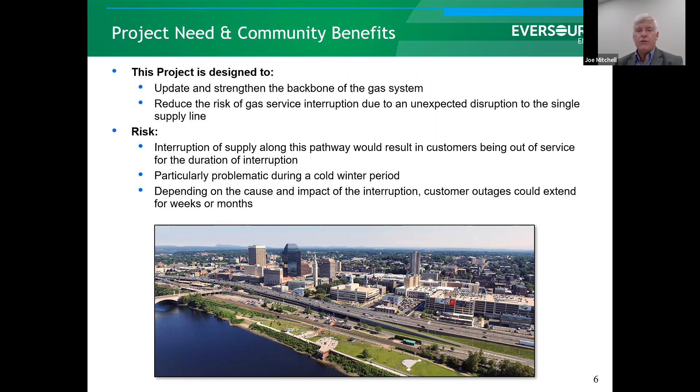In a gas interruption, it is necessary to shut off the system at every customer's meter, in addition to other system cutoffs. Additionally, after repairs are made to resolve the cause of the outage, valves are opened in segments, which include customer shutoffs. Safety checks are conducted, and pilots are relit. Entry into people's residences and businesses is required to accomplish this very time-consuming restoration process. The services of locksmiths and law enforcement are often required in this complex process.

If there were an issue to the distribution system originating at or near the Agawam gate station due to mechanical failure, natural disaster, or third-party damage, it could have an unprecedented impact on the community.

In such an event, Eversource would stand up its incident command system and would likely draw on the Federal Emergency Management Agency, or FEMA, and the Massachusetts Emergency Management Agency, or MEMA, and the National Guard for resources and assistance.

Temporary shelters would be established, and depending on the severity of the outage, some of those shelters could be a significant distance from the Springfield area. We would call on other utilities nationwide for mutual aid.

Making the system safe is a time-consuming process, especially with a high number of meter sets located inside of dwellings in this area. Assistance from locksmiths and law enforcement would be required.

Once repairs to the system are made, the process to restore service to customers is an even more complex and time-consuming one. Gas infrastructure is restored in segments, safety checks are accomplished, and pilot lights are relit in every residence and business.

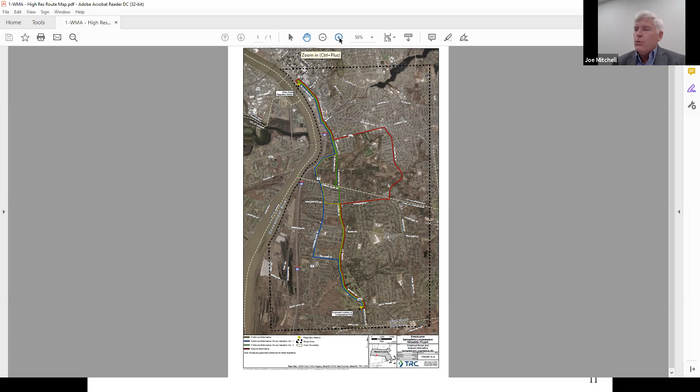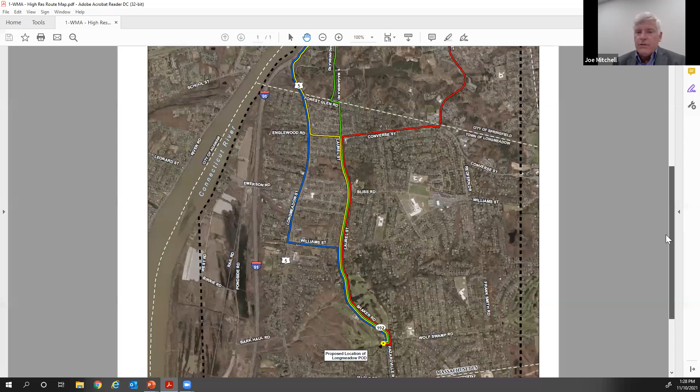This is a map of greater detail. As you can see from its elongated shape, it does not fit well in the slideshow presentation. I will zoom in now and go over these routes. Please note that the coloring on this map is different than the one on the previous slide, but you can see a greater detail of the preferred route, the variations, and the noticed alternative. Again, this is on our website, which I'll give you the link to at the end of this presentation.

Sorry for the delay.

Proposed point of delivery: the point of delivery is where the natural gas is transferred from TGP's transmission system to Eversource's distribution system. It is our desire to have the POD as unobtrusive as possible. All infrastructure will be contained indoors. The proposed buildings will be designed to match the existing Longmeadow Country Club building nearby. Noise reduction, construction methods, and materials will be used.

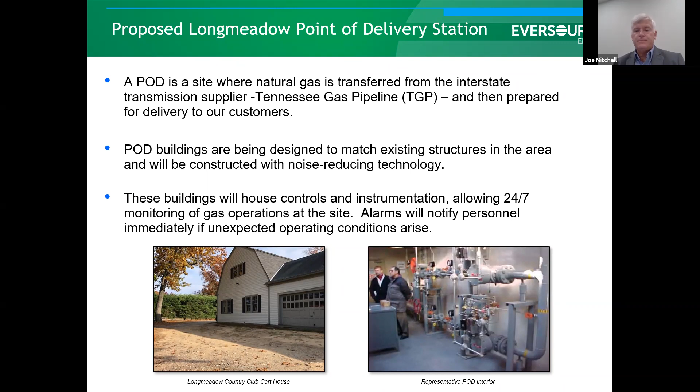It is proposed to have 5 buildings located on the approximately 2.5-acre site. 2 of the buildings will belong to TGP and 3 will belong to Eversource. The equipment inside the buildings will be used for pressure control, metering, heating, odorization, fire protection, security, and telemetry.

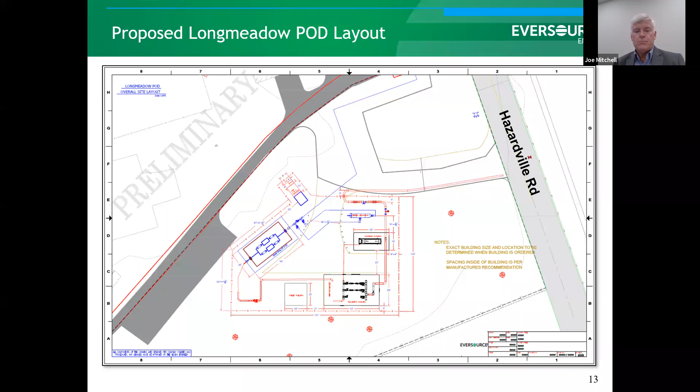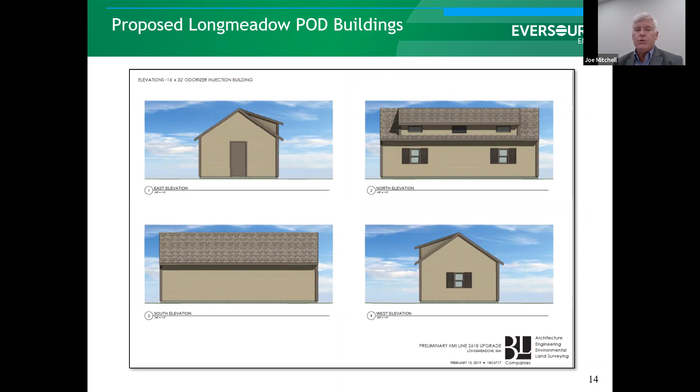The safe and reliable delivery of our energy products is the primary mission at Eversource. The point of delivery facility and the entire project will employ all of the latest technologies with an eye on safety. Alarms, telemetry, on-site visits, and corrosion protection are just a few of the safety measures to be engaged.

The individual who has been responsible for safety training in the region for the last several years is our Senior Specialist for Gas Emergency Preparedness, Eric Madison. Eric was a firefighter for 35 years, serving 30 of them right here in Longmeadow. He was chief of the Longmeadow Fire Department for 15 years. Eric knows the natural gas delivery infrastructure and is also intimately familiar with firefighting response and procedures. He is uniquely qualified to enhance safety through first responder training for all aspects of the proposed project.

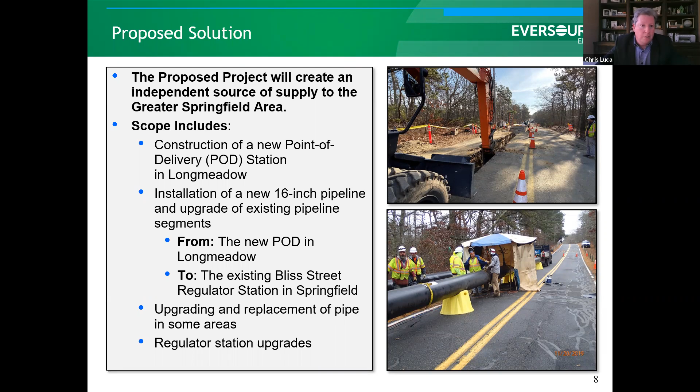Thanks, Chris. Next question, and we had a few variations, questions regarding the Memorial Bridge. Since the existing pipeline through Memorial Bridge and the new pipeline both go through the same Bliss Station, essentially, why is the second line needed? I think we need to clarify that. Rich, I'll ask you to expound on that a bit. So to clarify the question, the concern is that with this project, installing a new second source of supply for the area, would the Bliss Street Station and the Memorial Bridge still pose a risk of a single point of failure?

So to address the Bliss Street Station concern specifically, it is correct that both lines, the existing line that travels from west to east from Agawam across the bridge into Springfield and terminates at the Bliss Street Station, as well as the new line that we're installing north through Longmeadow and north through Springfield, also terminate at the Bliss Street Station. It is true that both lines do terminate there, but in order to mitigate the concerns of a single point of failure at that station, there are design considerations and design requirements that the Code of Federal Regulations mandates us to abide by. And most importantly, as it relates to this issue, is facility separation. So as we design this station, Eversource would be required to provide adequate facility separation to ensure that no single event would result in a failure at the station.

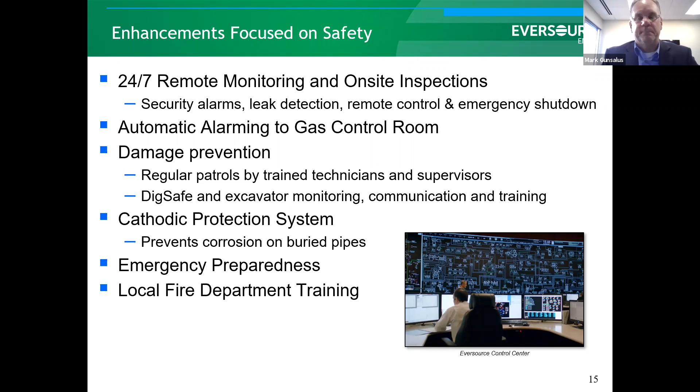Dispatch has already come over. We stood that up in June. The next piece will be gas control, which is now in Ohio. So they are monitoring and controlling our systems, working directly with our team locally. That will be the last operational TSA agreement in Q1 of 2022, and we'll be fully on SCADA at that point. Back to you, Chuck.

Great, thank you, Mark. Another question just came in, and I will have Nikki Bruno respond to that one. We had several variations of this question: what are you doing to prepare for customers transitioning off gas to renewable energy?

Thanks, Chuck. So we're doing a number of different things, but I think probably the most relevant is participating in and spearheading the concerted effort in the Future of Gas proceeding that the DPU has open. It's of course separate from this project, but all 5 Massachusetts-based LDCs are investigating decarbonization alternatives to meet the state mandates of 2050.

So we have a consultant actively engaged on providing technical modeling and alternatives. We're also going to be submitting in March a revised business plan for our gas company. That's underway, and I invite anybody who wants to learn more to visit our proceeding website. It's called

thefutureofgas.com. In the interim, Eversource specifically is working on a 2030 goal of carbon neutrality for our operations. We're also undertaking a network geothermal pilot in the NSTAR gas service territory to test that technology at utility scale. So we're trying to move alternatives along and learn from pilots and from the proceeding I mentioned, so that we can safely, affordably, and reliably transition customers to meet the state goals. Thank you.

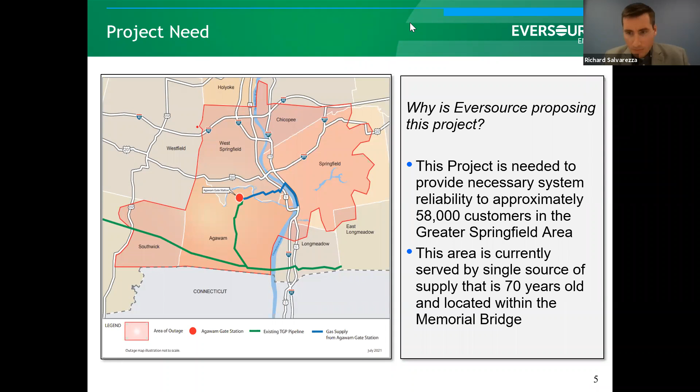In regards to the pressures that customers receive from the pipelines, this is another valid question. We would not actually be serving any customers directly connected to this new proposed pipeline. Its only function would be to send gas north to the Bliss Street station, so no service lines would be connected from it. I'll turn it back to you, Chuck. Thank you.

Thanks, Rich. Mark, I think we had a couple acronyms — TSA was one that people may not be familiar with. So let's just make sure we clarify those things for folks. Yeah, thank you for that, Chuck. I apologize, we have too many acronyms.

What a transition service agreement is — that's what TSA stands for. As I said, this was an asset purchase, so employees and assets came with the buy, and things like gas control and dispatch, for example, were under a transition service agreement so that we could safely operate the company while they dispatch for us, which is now in Massachusetts, and while they right now view and operate our gas control system. We have a very sophisticated agreement, so we know exactly what the communication protocols are, and a plan to get it transitioned over in Q1 of 2022. Thank you, Chuck.

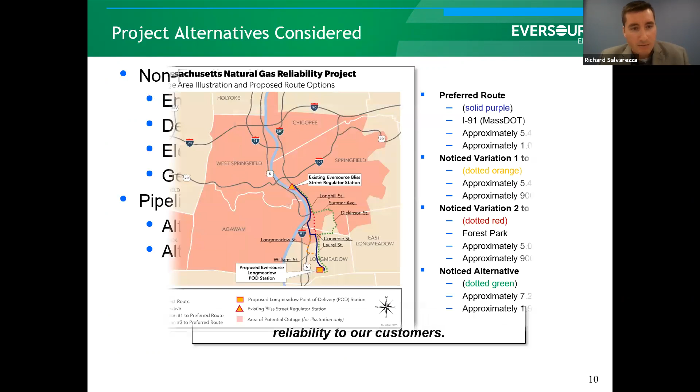I'll go into some details on the final 4, talking about some stats for each one. The preferred route, through our analysis, has earned the most favorable rating when we combine all the environmental factors, human impacts, and cost. This is a 5.4 mile route.

It originates at the proposed POD on Hazardville Road, turns onto Shaker Road and travels north, and Shaker Road eventually becomes Laurel Street. The preferred route turns west onto Converse Street and then turns north onto Longmeadow Street, where we cross the Springfield Longmeadow town line and continue towards the Longmeadow Curve area of I-91, and eventually pass under that Longmeadow Curve area via a directional bore, and we arrive at Longhill Street, where we travel north, eventually crossing Mill Street onto East Columbus, where eventually we tie to our Bliss Street regulator station. So that was our preferred route, 5.4 miles.

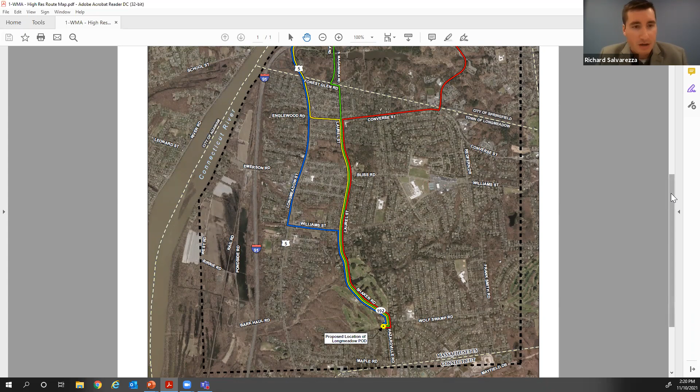There is a noticed variation, two variations of the preferred route. The first variation follows the same route north on Shaker, but it turns west on Williams and continues north on Longmeadow Street. It rejoins the preferred route at the intersection of Converse Street, and all other aspects of that route are the same. It is nearly the same length, again 5.4 miles, and it has the same cost of $34.7 million.

That's an estimate, and we're continually refining it as we move forward into our filing. It is a challenge to accurately estimate the value of a project like this. We're up against some fluctuating steel prices that are a significant factor for our estimate, and we're also attempting to forecast costs a few years into the future.

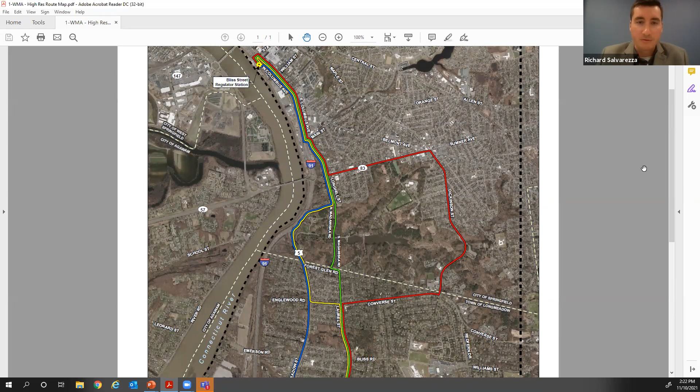So that was noticed variation 1. Noticed variation 2 is again very similar to the preferred route, traveling north on Shaker, north on Laurel, but continues past Converse Street, and in fact travels north through Magawiska, through Forest Park, and joins with Longhill Street, and then eventually, similar to the other routes, continues onto East Columbus. This route is somewhat shorter at 5 miles, and the cost is also less at $32.5 million. It is the least cost option, but it does have some additional environmental and human impacts, given that we are going through the parkland.

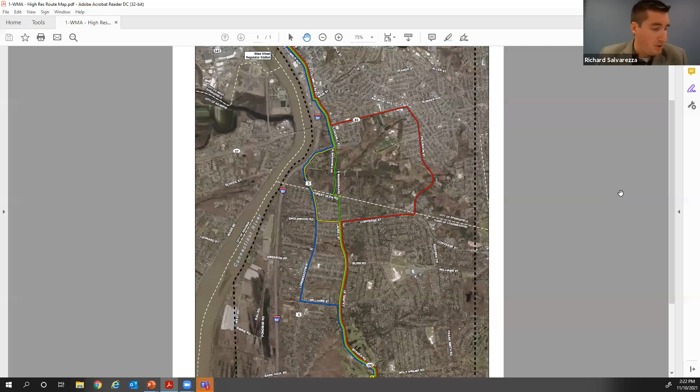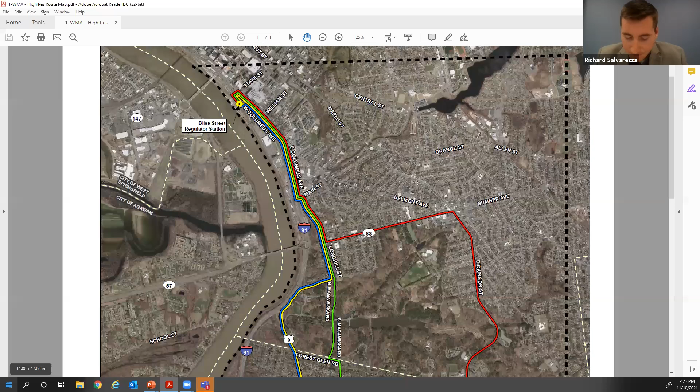The final route, the 4th route, is the noticed alternative. It's the longest route, significantly longer than the other options. It originates again at the Hazardville Road POD location, travels north on Shaker Road, north on Laurel, but this route turns east on Converse Street and continues to the Springfield Longmeadow town line, where it turns north onto Dickinson Street and follows Dickinson Street until we get to the area around the X intersection in the Forest Park neighborhood. We bypass the X intersection via some side streets, and we join with Sumner Ave, and Sumner Ave takes us to Longhill Street. So this alternative is the longest, 7.2 miles, and it correspondingly has the highest cost of $44.6 million.

So again, we're analyzing these routes. It's a statistical approach that combines various impacts, including human impacts, environmental impacts such as parkland impacts, wetlands, and it also looks at cost. There's a weighted formula that evaluates the routes, and this is how we've staggered or aligned our preferences.

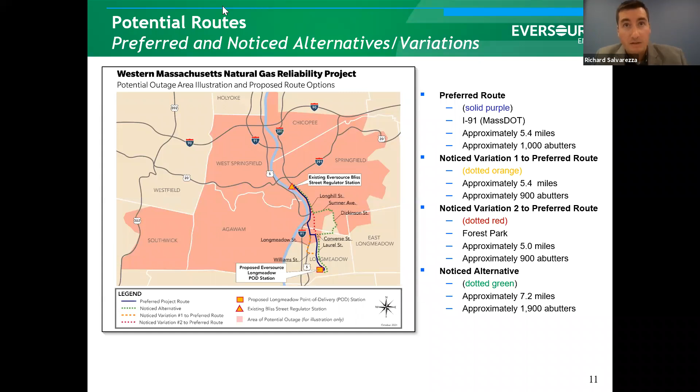In regards to how this project would be funded, it is correct that it would eventually be funded by customer rates. However, being that we are a regulated public utility, any project costs incurred from the project would be subject to an evaluation by the Massachusetts DPU, and the DPU would eventually determine whether or not those costs would be prudent.

And we have looked into what the approximate impact would be to our customers. For the average residential customer, the impact is approximately 1% per month, which if we look at the average residential customer, that cost would equal about $1.25 per month increase.

I did see another question in the chat regarding the evaluation of some western routes that follow kind of the railroad area, the I-91 area of Longmeadow, and travel north to the Longmeadow Curve area. There was some question of why we weren't analyzing those options, and to answer that, we actually were. There are 3 alternatives that we looked at as a component of the 12 initial routes, and those routes were eventually deemed to have a tremendous impact to the environment. There are some conservation areas, there are wetlands, and there's also impacts to I-91, which we're attempting to avoid. So 3 routes in that area, kind of in the railroad, Pondside Road, I-91 region.

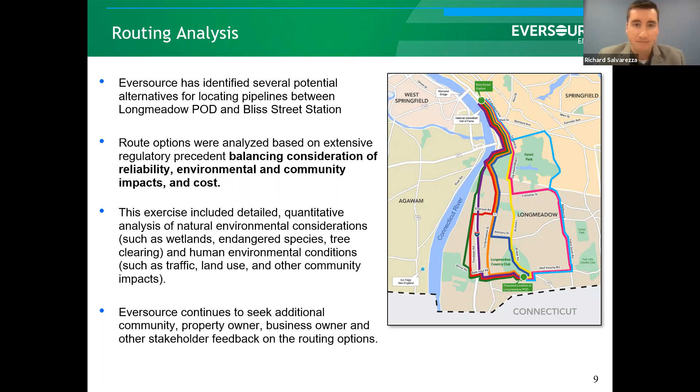So thank you for those questions. And Joe, if you wanted to jump in on anything I might have missed.

One clarification: when you were talking about the easternmost route, you said 44 point something miles, but you actually meant $44.6 million. The easternmost route, again, the noticed alternative, is the longest route at 7.2 miles. That's $44.6 million, the project cost inclusive of the POD. Thanks for that, Joe.

Just a little more clarification. Per the DPU, since we are a regulated utility, we would put this into a future rate case. If deemed prudent, the DPU would allow that rate to be carried by the ratepayer, spread across approximately 323,000 current EGMA customers.

One thing I wanted to come back to, Rich, there were questions earlier about the numbers, one was 44, something was 34. I know folks listening want something consistent that we can all agree on, but the different sources come from different documents. Can you briefly explain how the numbers aren't always going to be the same? They come at different times and for different purposes.